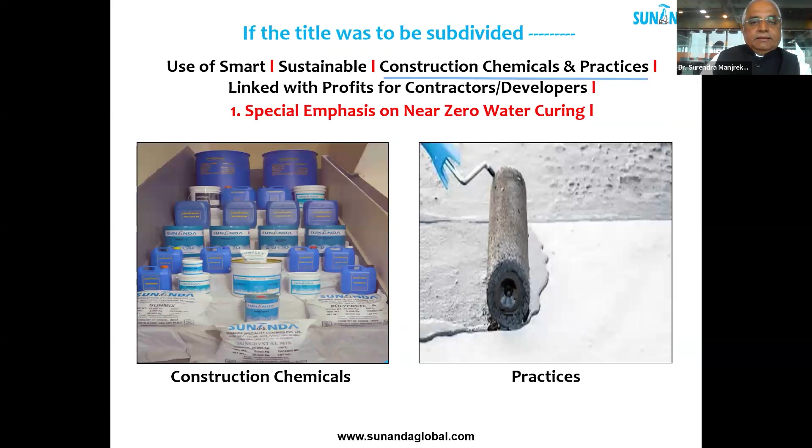If this title was to be subdivided further: first item, use of smart; second, sustainable; third, construction chemicals and practices; fourth, profit - profit should be soaring, going up north, linked with profits for contractors and developers; and finally, special emphasis on near zero water curing.

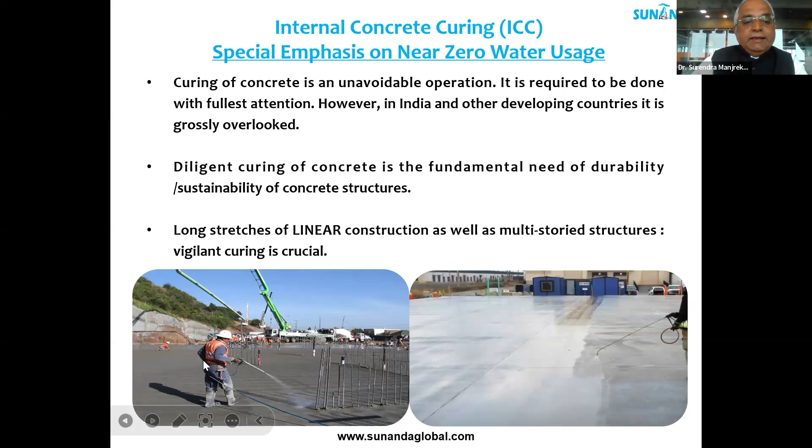So internal concrete curing, ICC - this term has been coined by the Federal Highway Administration, an organization much bigger than our MORTH, the Ministry of Mr. Gadkari. They have started working on this and coined the term ICC. I am trying to popularize this in India. Curing of concrete is an unavoidable operation - everybody knows that - and it is required to be done with fullest attention. However, in India and other developing countries, it seems to be grossly overlooked. Diligent curing of concrete is the fundamental need for durability and sustainability of concrete structures. Typically, long stretches of linear construction like roads and bridges, as well as multi-story structures, need vigilant curing, which is very crucial.

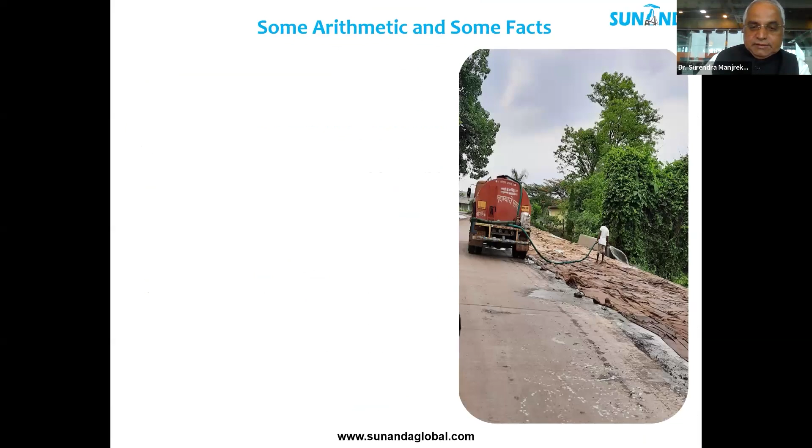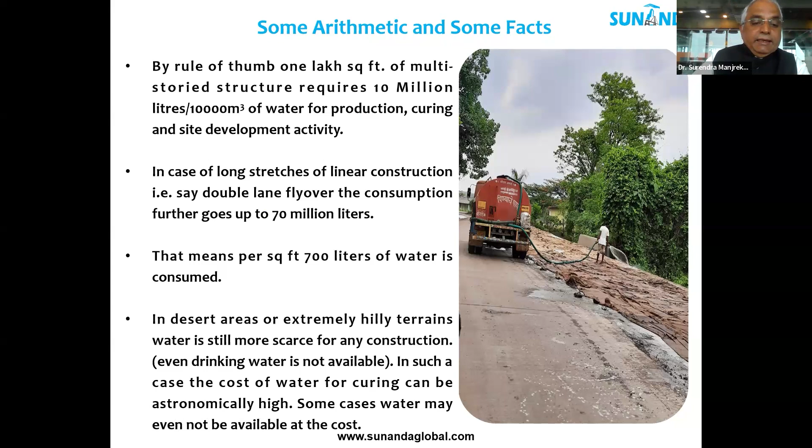Now some arithmetic and some facts. By rule of thumb, 1 lakh square feet of multi-story structure requires 10 million liters, or 10,000 cubic meters, of water for production, curing, and site development activity. In case of long stretches of linear construction, say a double lane flyover, the consumption goes up to 70 million liters. In desert areas or extremely hilly terrains, water is still more scarce for any construction - even drinking water is not available. In such cases, the cost of water for curing can be astronomically high. In some cases, water may not be available even at a cost - I have money, but I don't have water. I can't buy water.

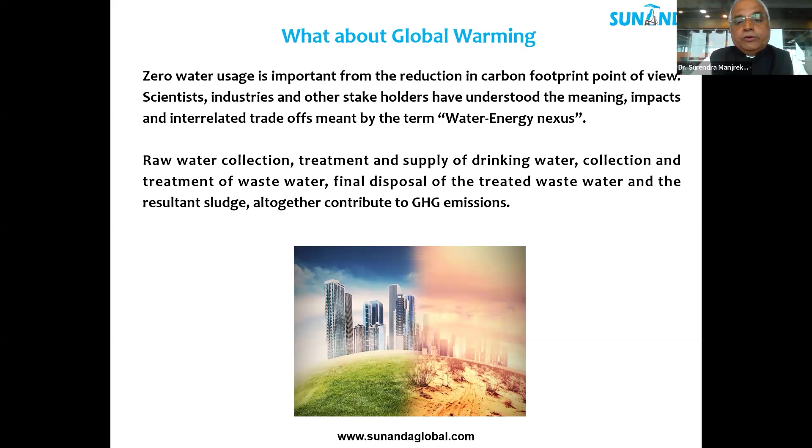And also, simultaneously, our another very imminent responsibility - today the temperature of Mumbai is 40 degrees centigrade, never heard of before. What about global warming and carbon footprint? What about our next generation? So zero water usage is important from the carbon footprint reduction point of view. Scientists, industries, policymakers, and other stakeholders all understand the meaning, impacts, and interrelated trade-offs meant by the term water-energy nexus. More the water, more the energy, more the carbon footprint. Raw water collection, treatment and supply of drinking water, collection and treatment of wastewater, final disposal of treated wastewater and resultant sludge together contribute to greenhouse gas emissions.

I'm giving these facts so the further explanation will be easy to follow. All the equipment in various water-related operations are operating on power throughout the year, on a 24-hour basis. Hence, power consumption is the major source of carbon emissions. For example, the United States, the highest user of electricity in the world, spends 13% of its electricity on water-related operations. It is reported by the Greenhouse Commission that every cubic meter of water consumed is responsible for 10.6 kg of carbon emissions. In other words, every cubic meter of water not used or saved entails a reduction of 10.6 kgs of carbon emissions.

I mentioned to you about multi-story structure earlier. If we even save 5,000 cubic meters of water, we are coming to the subject now, that 5,000 cubic meters of water translates to a 53,000 kg reduction in GHG emissions.

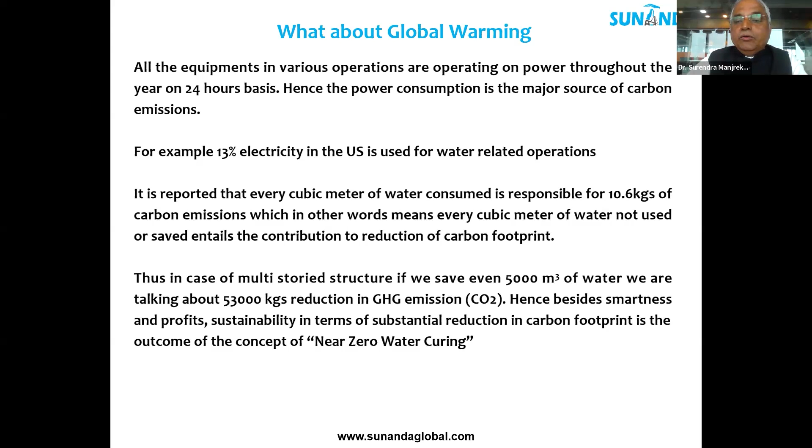Hence, besides smartness, let's go back to the title, remember the title: besides smartness and profits, sustainability in terms of substantial reduction in carbon footprint is the outcome of the concept of near zero water curing. Now, I have said near zero water curing, so we have to find the alternative to water curing.

Globally and in India, we should develop an alternative to water curing method system which can take care of inadequate or uneducated people doing curing, untrained labor, and reduction in cost of construction in terms of labor and water if you use no water. Hence, increase in profitability, reduction in carbon footprint due to net zero GHG emissions, creation of durable structures and sustainable environments. Above factors are well placed, but is it really possible to cure the concrete with zero external water and save environments, increase profits, and create sustainable structures?

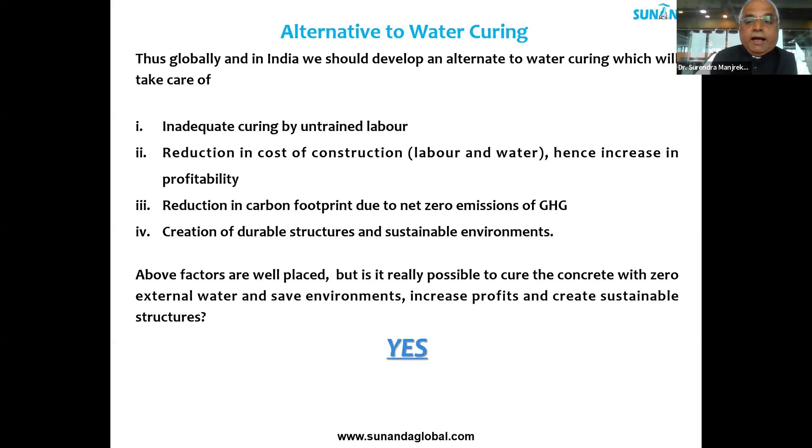So the question is, is it really possible? And yes, it is possible. It is possible with internal concrete curing systems, ICC, internationally called ICC. And how? As follows.

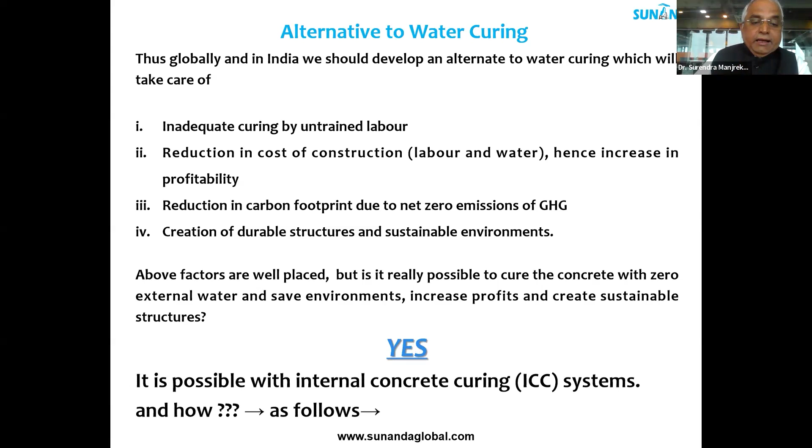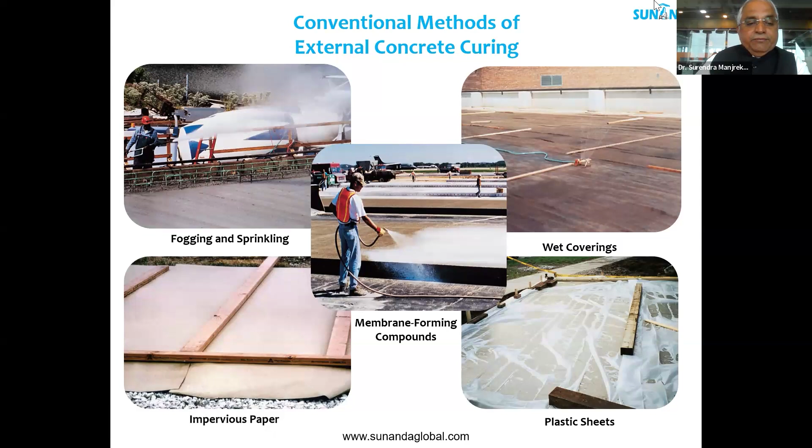We just hurriedly go through conventional methods of external concrete curing: fogging, sprinkling, wet coverings, membrane forming, impervious paper, and plastic sheets. All these are conventional methods.

What really happens, my dear friends, is that when the water tries to enter, it cannot go through the entire mass of concrete. Today we are dealing in M50, M40, M60, M70, M80 concrete, and the coefficient of permeability is so low that water cannot reach the interior, and that creates a thirst for water in the interior of the concrete.

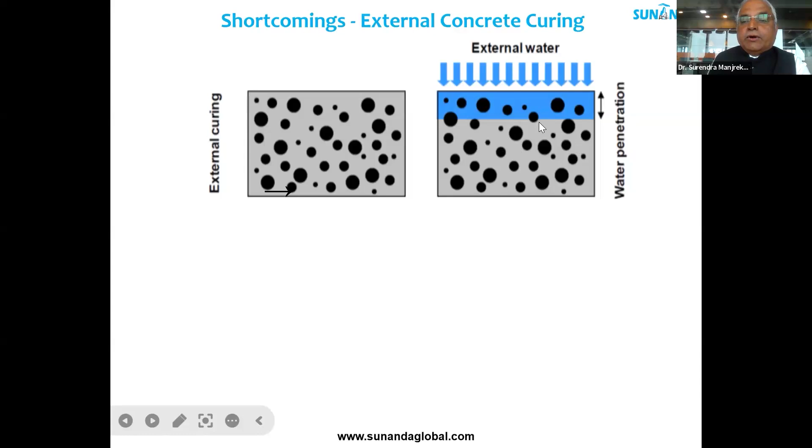In low water cement ratio, high performance mixtures, the dense microstructure can limit the depth of water penetration, like I mentioned. Now, very importantly, we see it in pavements, roads, and linear structures: concrete mixes needed for extended service life undergo autogenous shrinkage.

Autogenous shrinkage occurs at a very early stage, at a very early age, and that shrinkage causes stresses, and stresses are always relieved in terms of cracks, which can lead to early age cracking. Early age cracking is the biggest enemy of durability. External curing cannot address this. Despite external curing, early age cracking does take place, and that's the problem. How do we also take care of that?

These mixtures are prone to self-desiccation, internal drying. Internally, the water in the water-cement ratio gets consumed, and after that there is a thirst for water, as I say, and internal drying starts taking place. This is termed in technical language as self-desiccation.

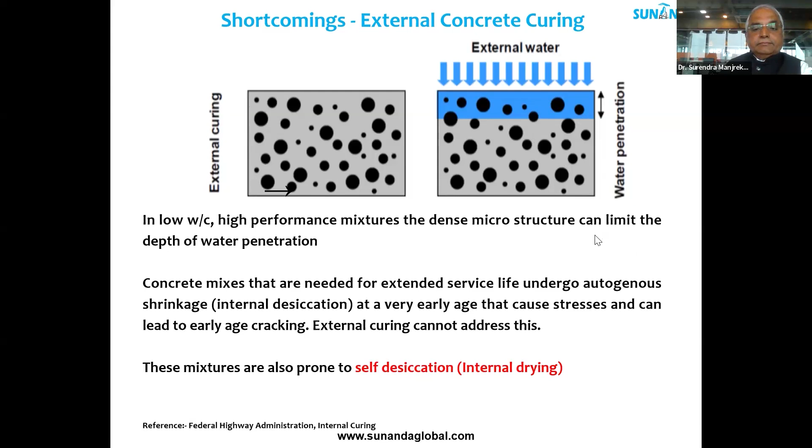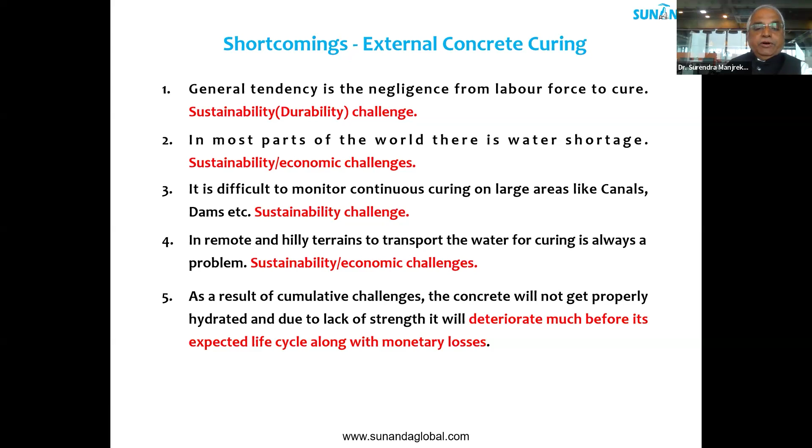What happens in external concrete curing? There is a general tendency of negligence in the labor force. Then, in most parts of the world, there is water shortage. It is difficult to monitor continuous curing on large areas like canals, dams, roads, etc. In remote and hilly terrains, as we mentioned earlier, transporting water for curing is always a problem. As a result of these cumulative challenges, the concrete will not get properly hydrated, and due to lack of strength, it will deteriorate much before its expected life cycle, along with monetary losses.

Very interesting thing, please focus on this: gaining strength without external concrete curing, how does it happen?

Typically, in long linear stretches, diligent construction curing is important, as I mentioned 2-3 times earlier. Several methods like external curing and internal curing are there. In internal curing, there are two types: number 1 is using absorbent lightweight aggregates, and number 2 is using construction chemicals, superabsorbent polymers, SAP.

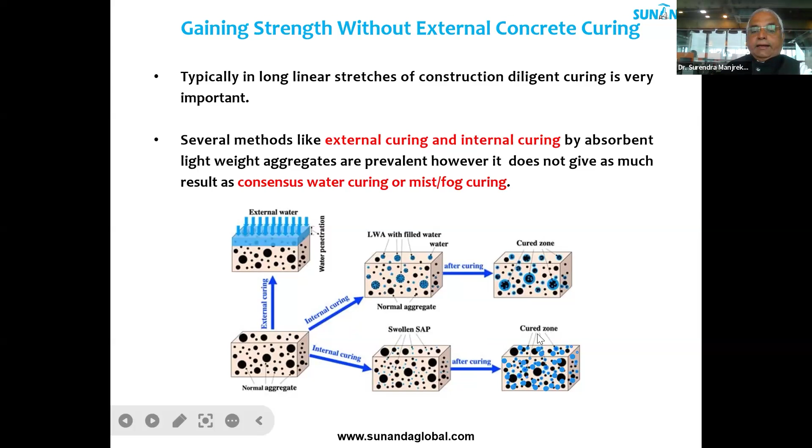In external curing, only from the top can some water percolate, and the remaining portion remains unhydrated, uncured, and hence doesn't get hydrated properly. Now, this is one case of internal curing with lightweight aggregates, and this is another case of internal curing with construction chemicals, that is superabsorbent polymers. You can see here, as compared to this, the entire volume of concrete has been hydrated and has gained strength. Here also it has happened so, but not as much as it should be.

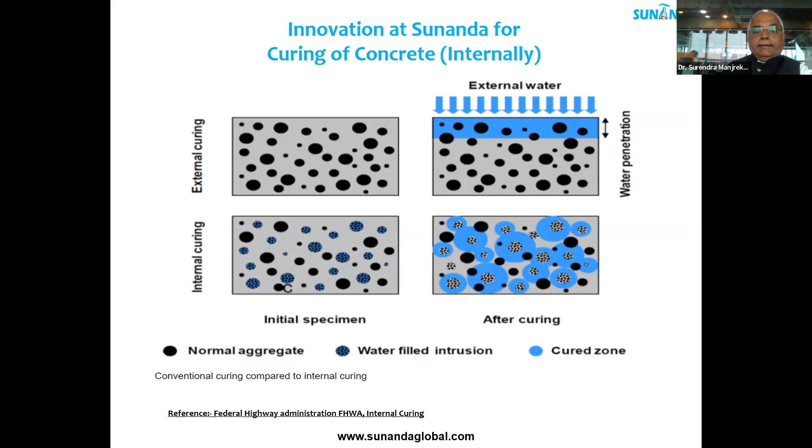So this is how it would be. External curing, water can go only up to a point, and then internal curing, the molecules get evenly distributed throughout the concrete as a smart material. They are nanomolecules, and those nanomolecules have a capacity to hold water 100, 200, 300 times their weight, and that water is released when required, and the entire internal concrete is cured by this internal concrete curing.

How simple is that? It has to be very simple. So far we have not used any labor force, any labor cost. Here also there is no labor cost. Simply they are in given proportion, 1.5% of cement content, you have to put it in the mixer, and that's it. That's all.

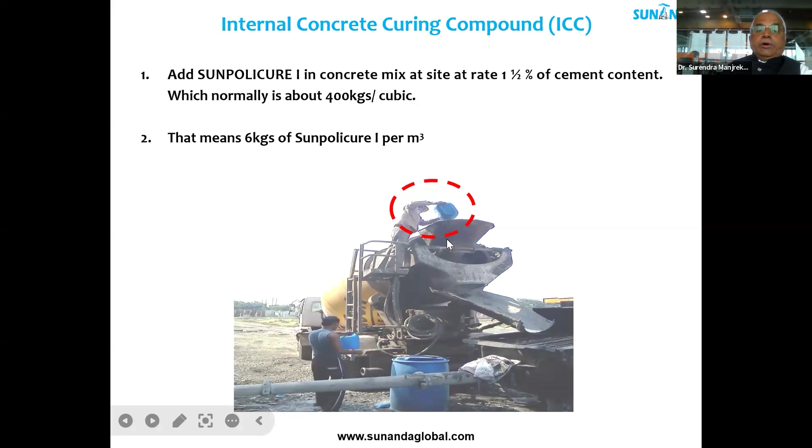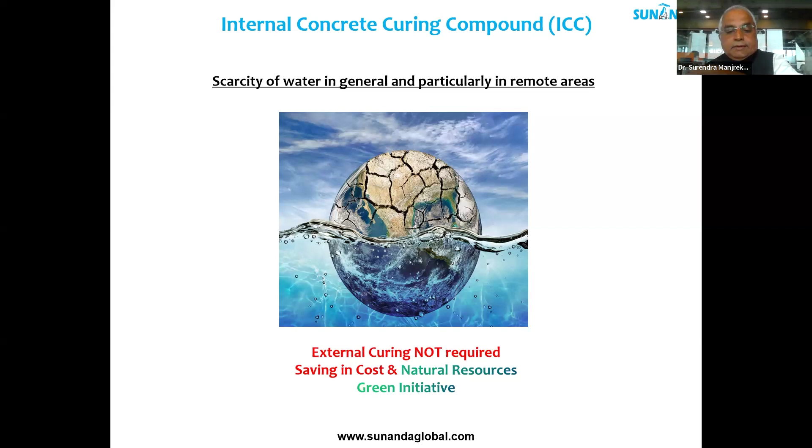So scarcity of water in general, external curing not required, saving in cost and natural resources, green initiatives. Lack of awareness is our basic enemy in these operations. Water conservation is our duty and necessity.

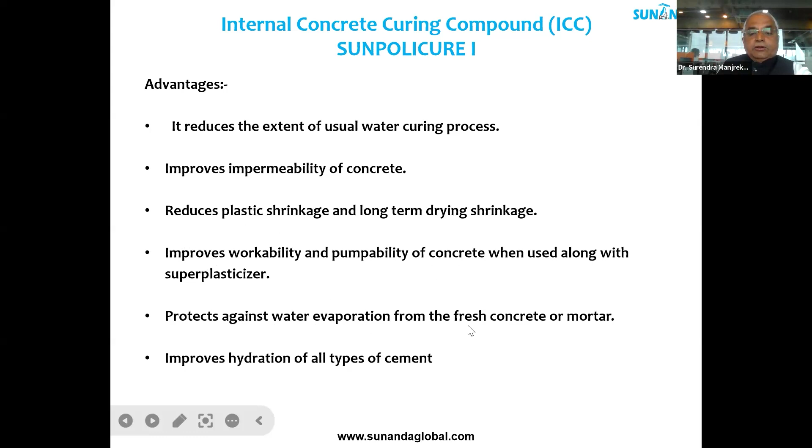Now, this internal curing compound, what does it do? The advantage is it reduces the extent of usual water curing process. It improves impermeability of concrete. Very importantly, it reduces plastic shrinkage and long-term drying shrinkage in early age concrete, improves workability and pumpability of concrete when used along with superplasticizer, protects against water evaporation from the internals of fresh concrete or mortar, and improves hydration of all types of cement.

And this is the proof of the pudding, 4 trials, results are here. Without admixture and without water curing - that is the first column. Second column is without admixture with water curing, that is what we generally do, or it is a semblance that we do. Third is with admixture, without water curing, and fourth is with admixture, with water curing.

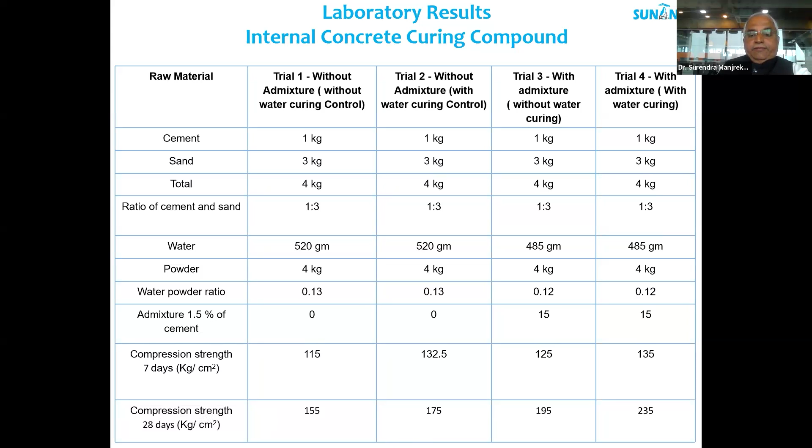If you see the numbers of compression strength here, without admixture, it is 155. Without admixture, with water curing, that is the normal thing we generally think about, is 175. Then, with admixture, without water curing, substantial enhancement, 195, and if it is both, it is 235.

Now we come to our very important bottom line, comparative costing. Material, external concrete curing, water 2,500 rupees for a certain area. This can vary from place to place, and it can vary from grade to grade. Internal curing compound cost is 1,800 rupees. Then labor, so many laborers for watering etc. - that cost is substantial. No manpower for internal curing is required.

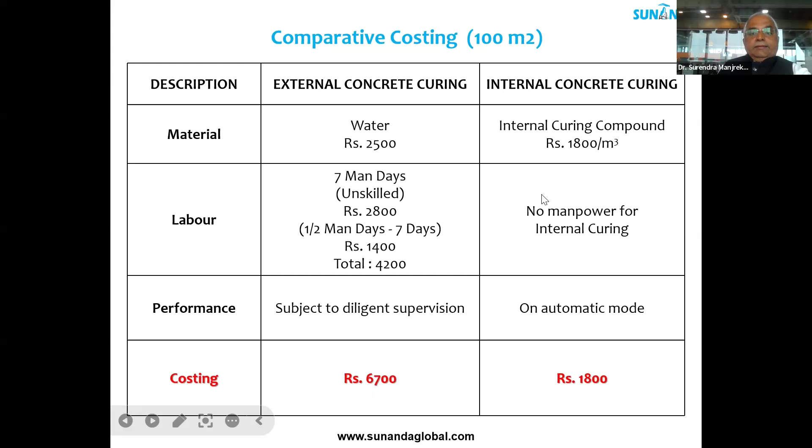Performance, subject to diligent supervision. If you do good curing, you get good results. This is here on automatic mode. So costing, very roughly, tentatively 6,700 to 1,800. So this is how the performance of this internal concrete curing would be. And believe you me, there is no option in days to come, in this global warming and other very important compelling factor. We have to move to this zero water curing as early as possible, sooner than later.

Then I want to take another very interesting case of reduction in carbon footprint. Story of Wankhede Stadium, Mumbai. Everybody has heard about Wankhede Stadium. Some of you must have seen the matches also there. What is the history of the stadium? It is located in Mumbai, right across the Arabian Sea, and the international and national cricket tournaments are held over there, and these tournaments have been held there for the last 50 years.

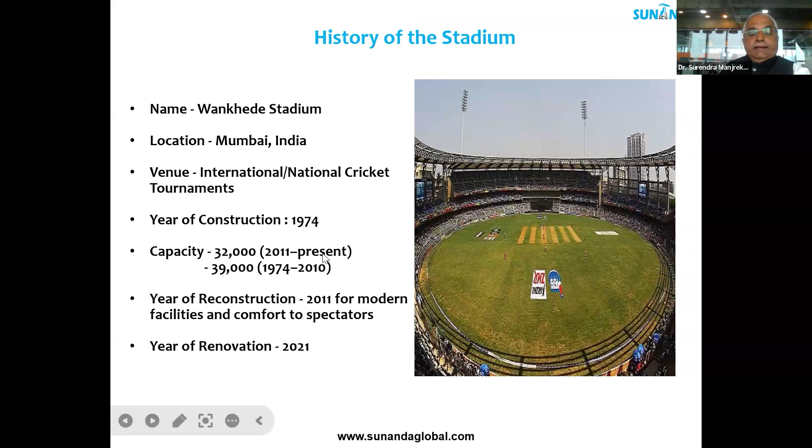Now, what really happened - 2021 was the renovation year, just after COVID or somewhere there. What really happened is that the structure was in very bad shape, and in another 2 months' time, or probably less than that, IPL matches were to be held over there, and it was already announced as the center. So this was the situation of the structure - the whole stadium was in shambles like this.

And we wanted - BCCI wanted to just put this as a playing center within one month or 2 months or whatever time was at hand. So here is the case that resources are available, but time is not available. Time is a more important resource than other resources like money etc. This is once again proven over here in this case.

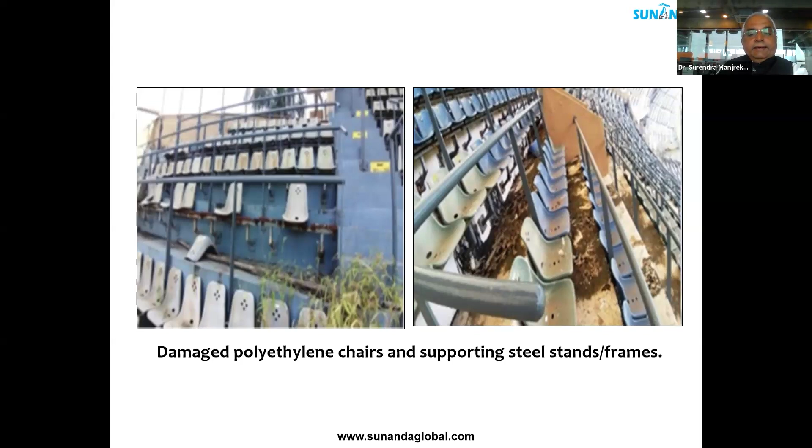So application of heat insulating, anti-carbonation coating, decorative coating etc. is being done over here in various stands because this is an open structure.

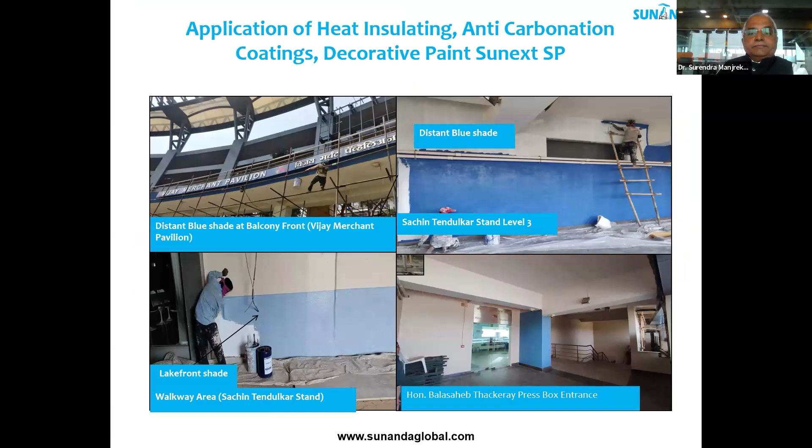The problem was waterproofing was okay, it was handled, though huge areas - 8 lakh square feet and all - needed anti-carbonation coating. But then the ingenuity was that there were polyethylene chairs, and these polyethylene chairs were to be restored using some innovative technology.

Why? Because all 38,000 chairs, they were ready to buy, but there was no time to buy. That's why we had to just put this thing in order, and they were happy even if it lasted only for 1 year, one IPL.

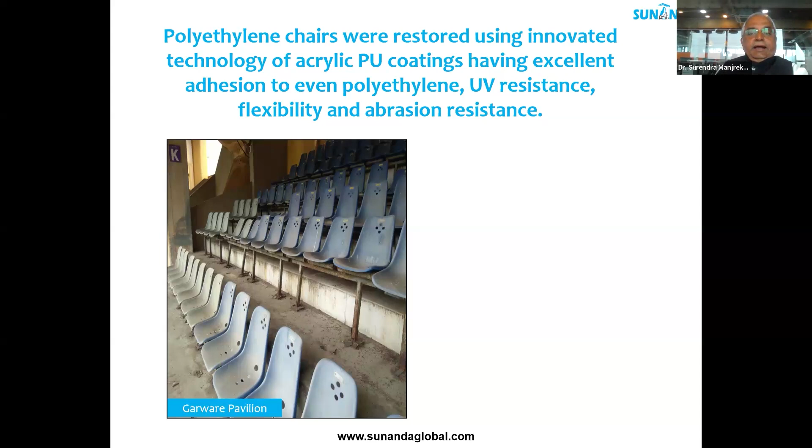Cricket is a religion in India, and every first tier city, second tier city, third tier city has some stadium or other. They are open stadia, and they undergo this beating - ultraviolet light, rain, water, anything - and they often need to incur very heavy expenditure. That's how I thought these developers, these contractors can just do it efficiently like this.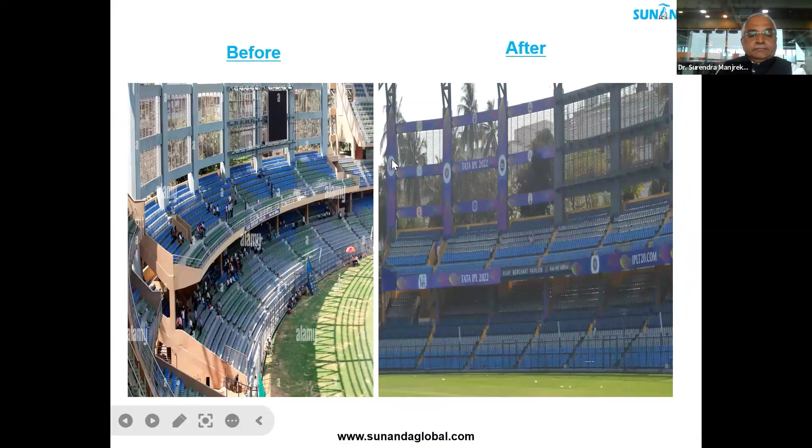This was how the stadium used to look like earlier, this is how it looks like now. Finally, in 2021, it looked like this, and in 2025 also it looks like that. Recently, the matches were held, and there will be again matches that will be held.

So let's talk about profit, saving, and reduction of carbon footprint. Price of one polyethylene chair is rupees 2000 odd, 2500 odd. So it goes to 9 crores 57 lakh 60,000 rupees, very roughly.

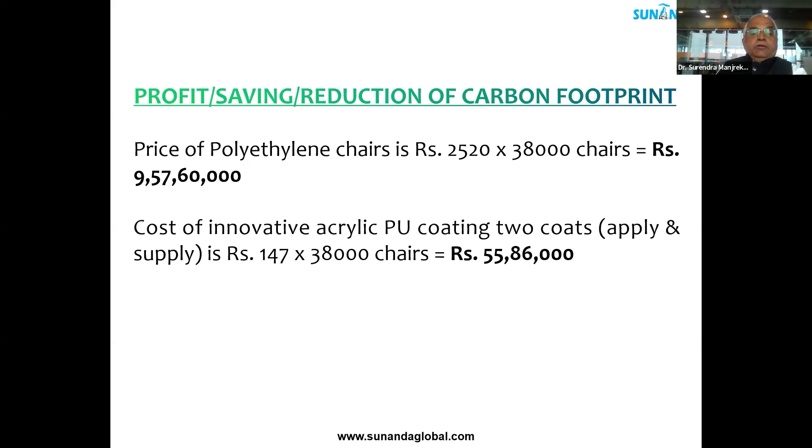Cost of innovative acrylic PU coating - that was the job and the expertise which was necessary - that is what construction chemicals can do for reducing carbon footprint. We'll see how very soon. The cost was 55 lakhs 86,000 actual cost incurred, in case of 9 crores 57 lakhs and odd, which the body was ready to spend. The profit was to the whopping 9 crores 1 lakh 74,000 Indian rupees.

So reduction in carbon footprint - one thing we have seen is profit, economy. Now we have to look at reduction of carbon footprint in restoration of stadium bucket chairs. Bucket chairs are made of polyethylene, and they were in bad shape, as you saw, and looking aesthetically unacceptable.

Clients were ready to replace all the chairs with new ones. However, the time constraint was there and it was not possible, which led to the decision to refurbish and renovate the existing lot and existing lot only. This involves - please mark this - suitable case use of construction chemicals, just selected ones, and extreme expertise to tailor make that. The carbon footprint of 1 kilogram of polyethylene, LDPE, PET is 6 kgs of carbon dioxide.

Weight of one bucket chair is 2.6 kgs. Hence, the carbon footprint of one chair is 15.6 kgs. That means 5,92,800 kgs of carbon dioxide for the entire stadium was reduced by this operation. I am talking in addition to the profit or the saving that we did.

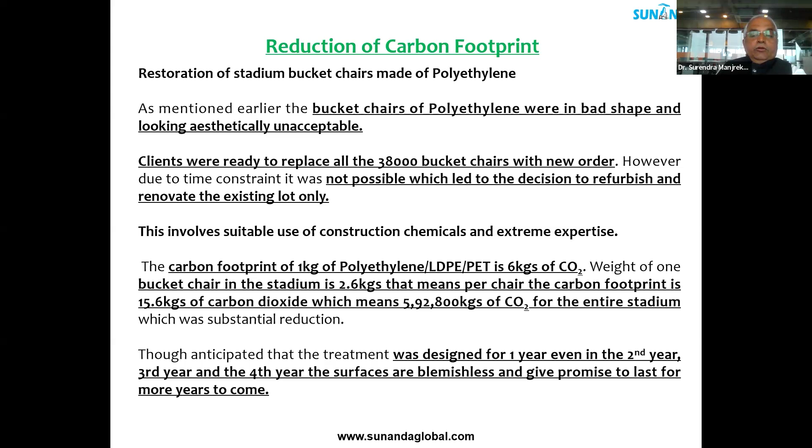So, though it was anticipated that the treatment should last only for 1 year - again, it's a good happening - it lasted for second year, third year, fourth year. And if you go to see a match this year, you'll also find the same thing, the same condition. Look of Wankhede Stadium today.